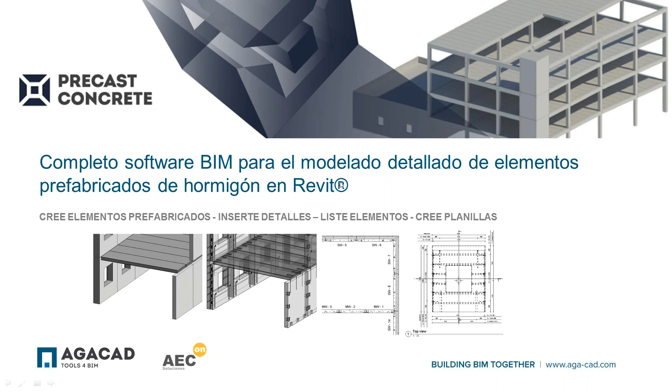Veréis que con Precast Concrete podremos crear elementos prefabricados a partir de los elementos arquitectónicos que ya hemos creado en nuestro modelo de Revit. Podremos insertar detalles, podremos crear listados de elementos, obtendremos directamente las planillas y veremos cómo todo el flujo de trabajo, a partir de que estamos modelando el diseño, el resto de la información se va actualizando hasta la planilla, con lo cual el ahorro de trabajo y esfuerzo a la hora de crear finalmente las planillas de producción es realmente importante.

La aplicación Precast Concrete incluye estas funciones: el Floor Panel Layout, que nos servirá para convertir los forjados, las losas de Revit, en el panelado de forjados prefabricados. Luego Smart Walls para todo lo que es la gestión, el manejo y modelado de muros y sus juntas. Los Smart Details para crear las conexiones y los detalles de las conexiones. El Sort Mark para crear una clasificación automática de los elementos. Y finalmente los Smart Assemblies que nos van a permitir crear los dibujos, las planillas de nuestro modelo.

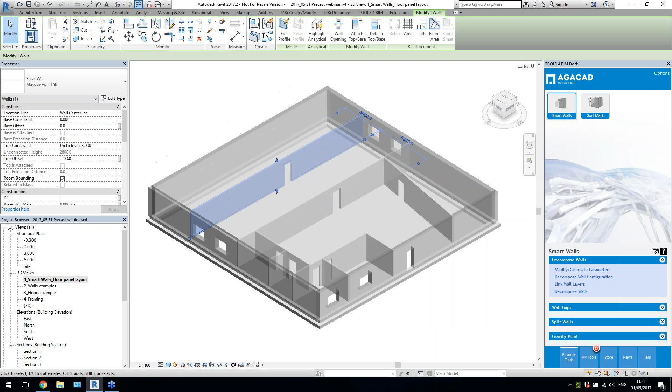But let's take a look at how does it work and what can we do with this solution. So when you model some elements in Revit, you can further use our tools to reach the result you want. So what do we have in Smart Walls? We have Decompose Wall. This option gives us the opportunity to split the multi-layered wall into a couple of walls.

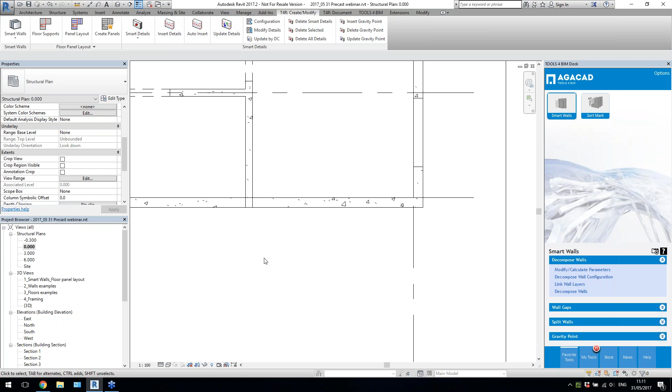So if I select, let's say, 2 of these walls, and I click on decompose, I have some configurations for how to decompose them, what walls should still remain, and so on. But now you will see that I have different walls, and if I select them, these are not layers anymore, but only walls. So let's say I make them architectural, and I have only structural walls now.

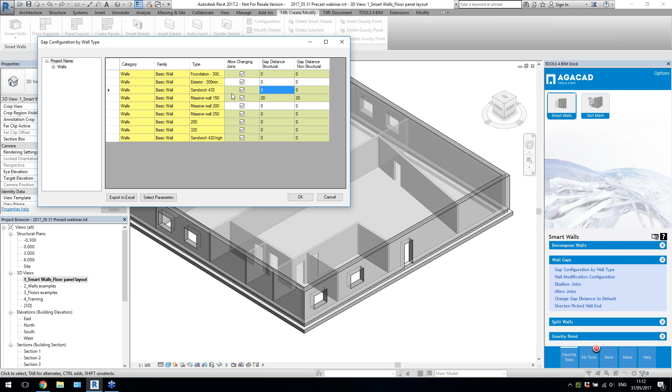So that's one of the features, but let me just undo that, let me leave it like this. What actually I want to show is other functionality, which I use more to create panels for the precast elements. In wall gaps section, I have some gap configuration by wall type settings. In these settings, I can define what should be the gap when I split the walls into the panels.

Let's say for this type of wall, I want to have 20 millimeters gap; for this type of wall, I want to have 0 millimeter gap, and so on. So to work with walls, we have the split wall menu, and we have the shorten picked wall end command, which I use a lot. Let me just switch to level 0 and show you how it works. If I select this shorten picked wall end command and select the end of the wall, you will see what happens: it just disallows the joint, and gives me this gap, which is defined in these configurations. So I can go around my walls, separate them, and just make some individual walls separated from the others.

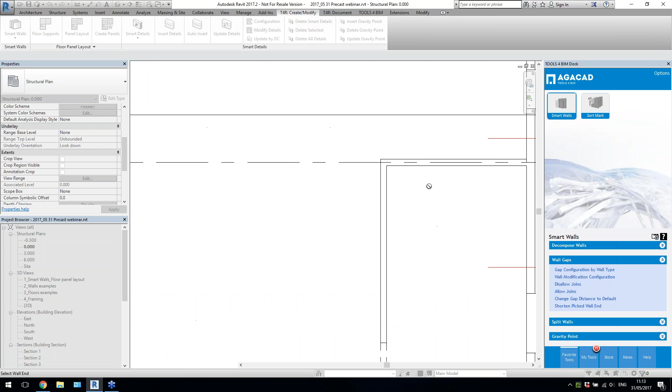If I click on this one, I can change the position, right? Let me just do this a couple more times. Okay, this one also, and this one. Okay, so I separated the walls. Now they are not joined. This is what I want actually.

Now I will switch over to the split wall menu, and what do we have inside here? We have some splitting commands, like individual splitting commands by selecting grids or other walls. We can split by openings.

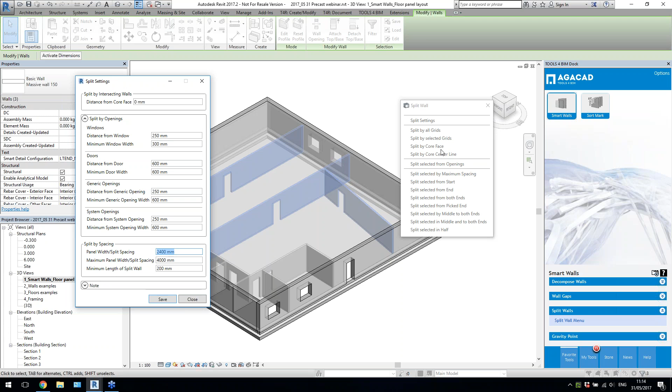So let me just go to 3D view, and I will actually use this. We have split settings here, right? So how to split around windows, around doors, around other openings, and what should be the distance for the panels when we are splitting them by using these commands, right? The maximum is for this command, and this distance is for other commands.

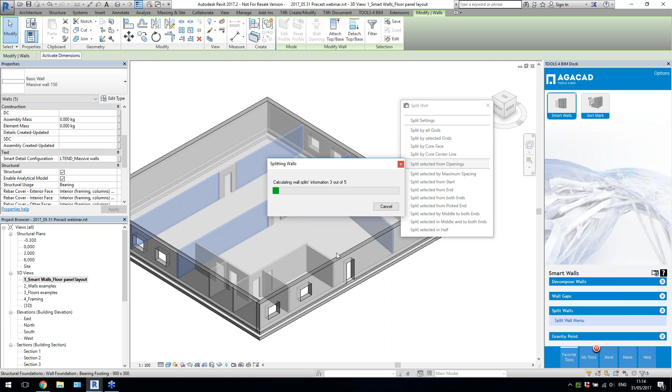So we can define some settings here and then use it. So I select a couple of walls and split from selected openings, and it will just do it like this. Then let's say I would like to split these walls also just from the start of the wall by a defined distance, right? So now I have this wall where the length is just based on my splitting settings, and then the leftover here. So I split some of the walls.

If I select this one, split by maximum spacing, let's say. So again, I have big walls just based on this maximum spacing value. It just divides all the length of the wall and applies the biggest value it may.

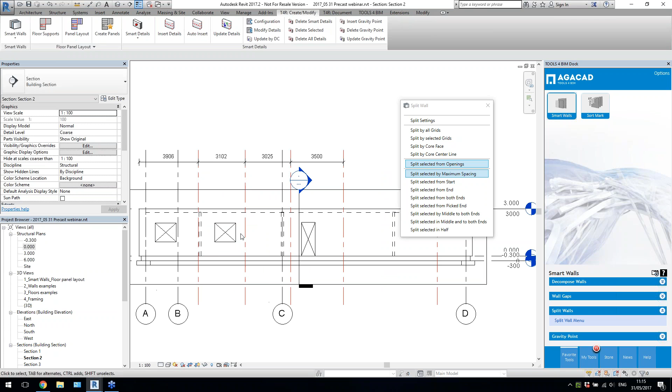Then I have some individual splitting options. Let's say I can use grid lines to split the walls. So I will go to the section view. Let's say I just create grids like this, different type, and then I can place some dimensions and define really exact positions of my splitting location, right?

So let's say I can fix that, and then I can split by selected grids. So I select the grids which I want to be splitting points, escape, and select the wall, and then escape, and then it will split into the exact panels which I defined with the grid lines, right? So now I have all these panels split.

Let me go to this view. So, okay, I have it here. I have this one. Okay, so that's basically it.

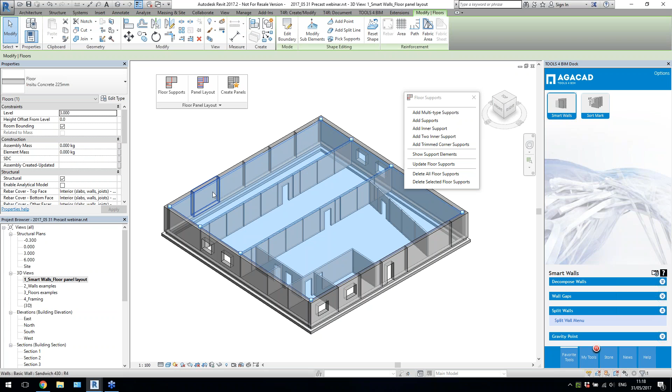So I have regions. Where do I want to place my floors? I want to have a floor from here to here, from here to here, and from here to here. So I need some regions, okay? So I'll add a couple of more. I will add this one, this one, this one.

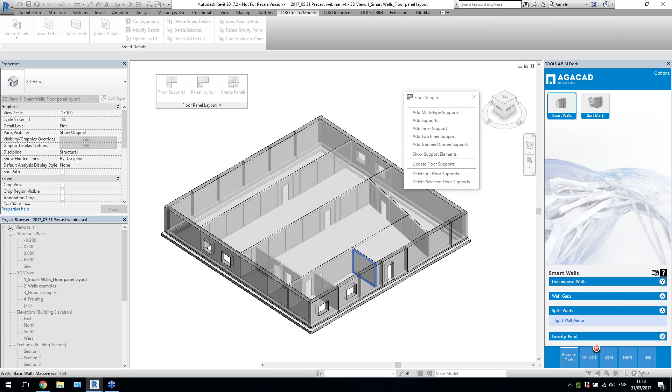No, actually, I would like to make it a little bit in a different way. I can also, I think I will do it like this. I will split this one again by selected grids.

Okay, so now I have it. I think it will be better also for the floors, so let me do that. Okay, I have it like this. Now let's add supports, additional supports. Okay, so now it's what I want.

Now I have different regions here. I just split into the regions and I select the supports, right? So I will close down this one and open the panel layout.

In the panel layout settings, we have what size of a panel should be created and what should be the rule. When I select that, I can select the option if I want to create panels for one of the floor. So just like this. Maybe I will just delete that.

Or I can do that for the whole floor, right? So I select one of the panels and it will just create the layout of the panels based on the supports. If I don't like this region, I want to update it, so I can click on this side, close to this side.

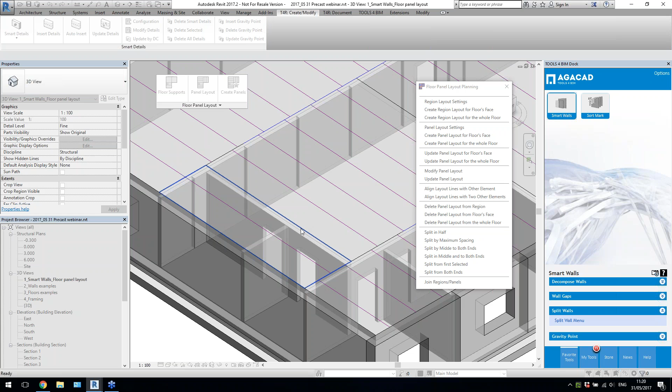This will define the direction of my floors. So if I click on that, it will change the direction, right? If I click near this side, it will change direction to that side. So I can modify that. Okay, so I want to have it like this.

Again, I can join the regions - maybe I want to have a massive slab in this place, or just a cast in place region, and so on. So I can do that. Then let's say I can modify the panel layout - I will just select this one, change the distance, modify, and it will give me a different layout, okay?

So currently what I'm doing is just the planning, right? I only have lines, I don't have actual panels yet. But that's why I need this last step - to create floors just in these planned areas.

In panel settings, I can define that I want to have this kind of support width for the panel above the wall. So I can define these values. I can also select the parameters for the floors, so I can make a schedule with the width and length, right?

Then for the precast floor, I just select the type of the floor, and I can insert holes if I want to. These are predefined holes, but you can modify them if you want to. So you prepare these settings - how do you want to have supports, and what kind of floors should be used.

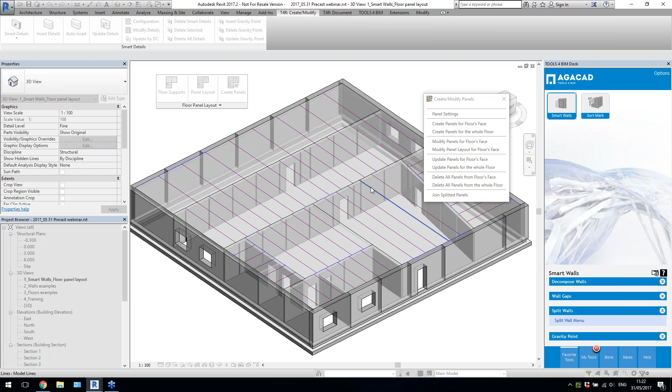And then you create panels for the selected floor face or for the whole floor. So let me do that for the selected floor face, and I will just select one of these lines. You will see now that in this area, I have this kind of floors. They have automatically calculated parameters, so I can make a schedule.

These holes are a generic model family. I can edit and modify it simply by editing this profile - this is the sweep, right? So you can easily edit this family based on your local manufacturer.

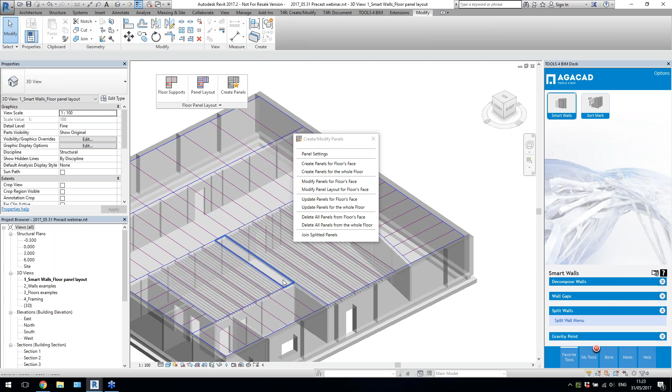Okay, so let me get back here. Maybe just create another one over here. So again, the floors like this. In the leftover, which is not 1.2 meter, I have only cast in place or just a selected type of floor, right? So this is a different type of floor, and this one applies in this area.

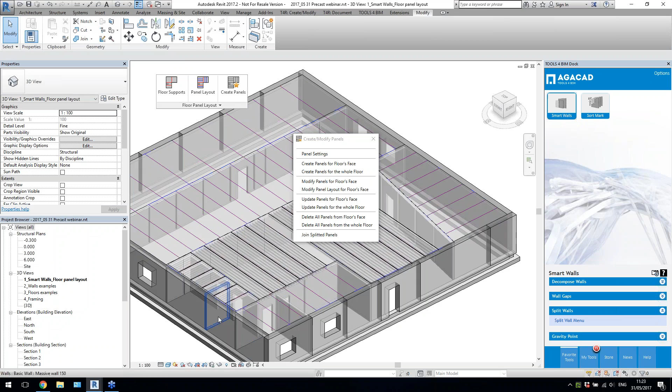Again, I want to change the size, let's say, for the small slabs - I want to use different holes, right? So I will do it like this. Sorry about that - create panel, and just create it here. So now I have smaller slabs over here in this area.

Then let's say I don't want to have holes, I just want to have this thickness of the floor. So now I'll create floors over here, and now I have the floor which goes like this.

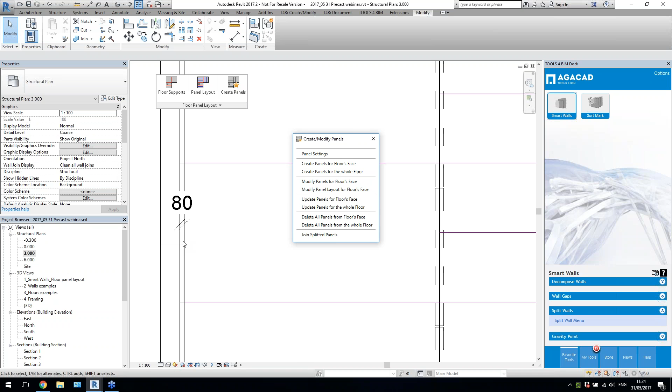And if I go to level 3 and measure now the distance for my floors, this is the floor which I created, and you see that this is the distance - 80 millimeters, like I did here in the settings. For the walls, I have 80 millimeters, or from the face. So when I create the floor, it automatically places my floor and extends it over the structural wall. So that's how we can create panels, right? We can create our floors.

Let me go back to this view. Okay, when we model these elements, what can we do next is use smart details. So smart details is basically a solution to insert details, connections, cuts, just to get to the final shape of our elements.

So let me show how does it work. It has configurations - in the configuration, you select category of elements which you want to work with.

Let's say I want to work with walls. So I switch over to this category.

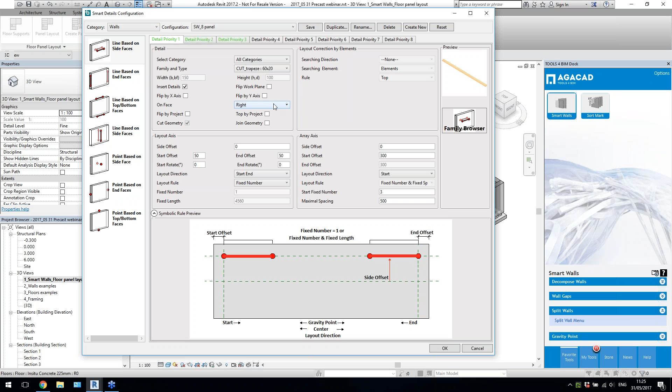Okay, now you see I have created a lot of configurations, but just for different purposes. So what you see here is tabs where you define where and what kind of detail and in what kind of rules should be used to place this detail. So these are for the line-based elements and these are for the point-based elements.

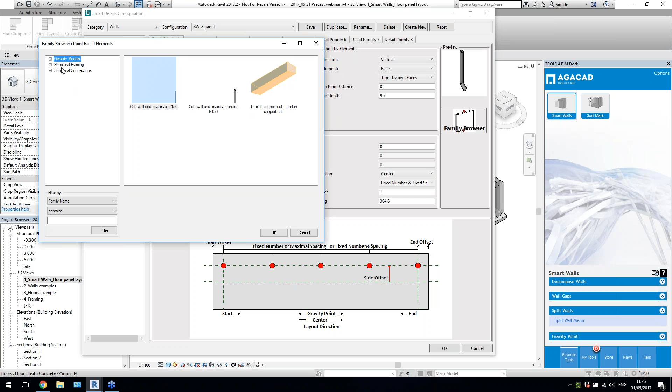So let's say I select this tab and I want to place on this face some kind of detail, right? So I go to this detail priority tab. I select my family, which I want to use from the list or from the family browser, which I have. So these families could come from manufacturer, or you can create them on your own. And you decide where to place it.

So I want to place this at the bottom face of my wall this time. And I want to place it just side offset. You see all the options here, some start offset, and so on. I want to use the rule maximum spacing. And then I want to place in the other direction. In this direction, I want just to place it in the center, with just one element.

And then layout correction, we have some options here to look for the solid faces like you see in the picture. So if there is not enough space, this detail will not be inserted, and so on.

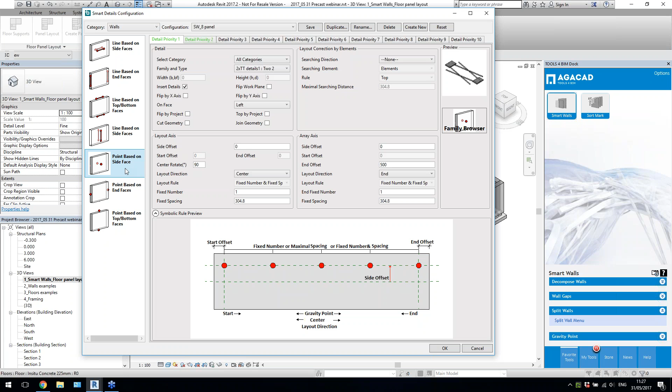Then what else do we have? Let me switch over to our CAD configuration, and I will show you, let's say... okay, what else? What should be?

Okay, I want to insert a detail at the end of my wall only if I have a T connection with other walls. So if I have a T connection... okay, maybe this one. So I want to place it on the side of the wall if I have a T connection with the wall.

So I have different kinds of connections with other elements. It could be walls, it could be structural framings, or other elements. If I find an intersection, I will place this detail. If not, this detail will not be placed at all.

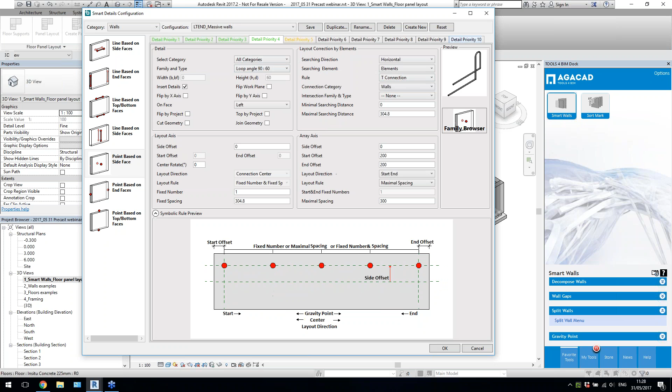So let's just close down this window and see how it works. Actually, maybe I'll just filter that—check none. Okay, I'll just hide these temporary elements.

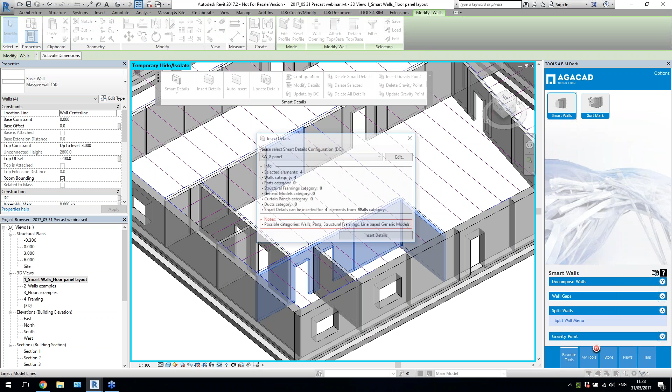And let me just select a couple of these elements, right? Maybe this one. And now I will select to insert details. And the list of configurations appears. And if I select my configuration, this one, and I will insert details, right?

So it will just place the details based on the rules for all of these elements. So we will see some different results because, as I said, we can search for different connections and insert different kinds of details. So let's take a look at this one, right?

So it has only end connections, so it places only these details just based on my settings. Then these details are at the bottom face and these details at the top face of my wall. Also, I have this kind of cut at the end of the wall, so I can place it and use it, right? And then let's take a look at this one.

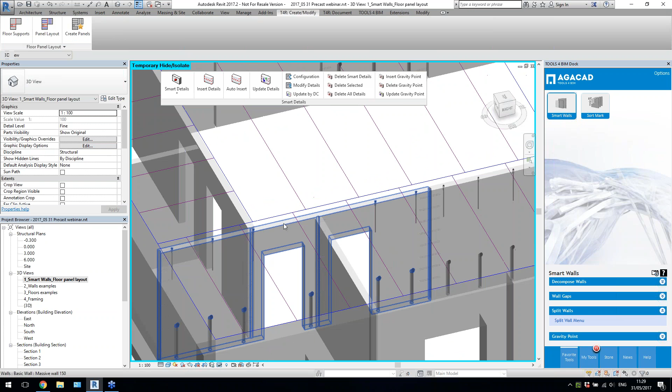If we take a look from the top, maybe it's the best visible view. So you see we have this type of connection because we have a T connection. If I select this detail and click on modify, you will see that this detail is only inserted if we have a T connection with a wall. So now I have this detail and I have this detail at the intersection with walls.

Then this one, again, at the end it has just a simple one, but then it has an L connection like this between the walls. So it places this detail when it's an L connection with other walls. So I can define what kind of detail and where it should be inserted, right? So these are a couple of examples.

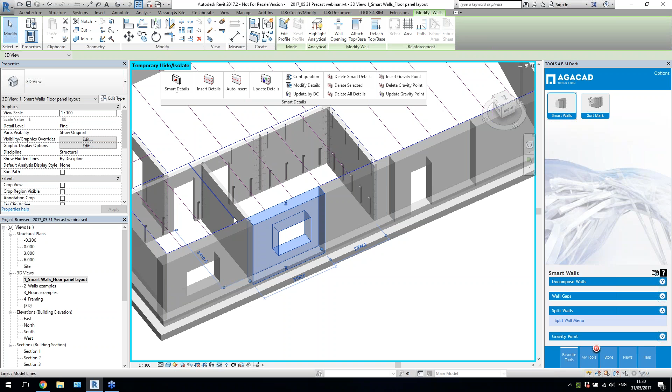Okay, maybe I will show you another one. Or maybe, okay, we can switch over to the other one. Let's say over here, right?

So if I select... let me just filter the floors. I selected a couple of walls and floors, select to insert details, select the configuration which I want to use, and insert them, right? So now I have my cuts at the end of the floor.

So again, this is just what I created, right? I can modify this. This is the line-based details placed on the top.

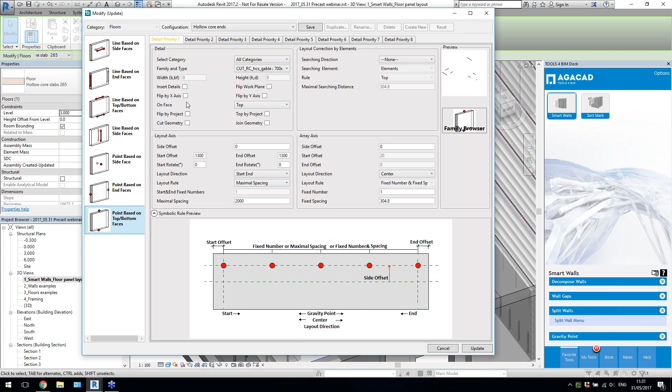I can just make some changes, click on update, do some individual changes. I can select the floor again, just modify these details. I have some predefined details, so I will just click on update, insert and update. I will place some anchoring cuts for this selected floor and so on. So I can quickly make some manual modifications. I have modify, update, delete options and so on.

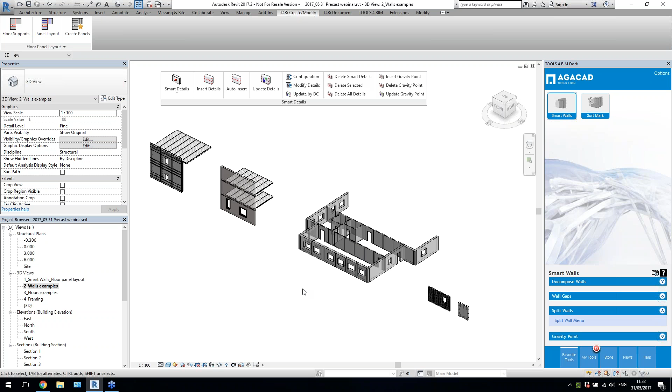Let's take a look at a couple more examples. I have here, let's say, these walls, they are pretty high, right? So I just placed some of the reveals by a defined rule. I placed also some sweep just outside the wall, to join with the wall. Then at the top I have a cut and so on. These details are good also.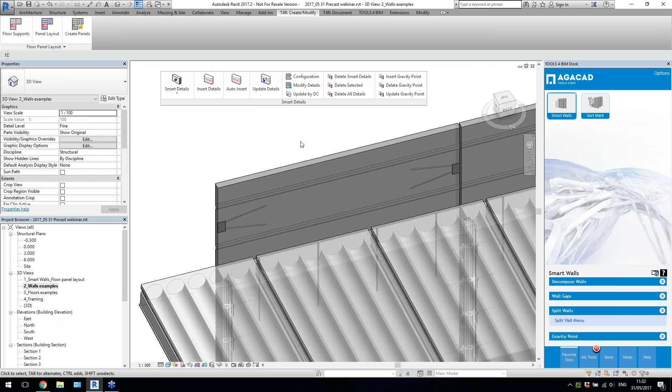Oh, I see these details are bad, but actually what I will do is just click on modify. I know that I selected the wrong family here, I need to select this one. Smart details have the possibility to read information from the object, so you see now the wall is this size, but the details find the size of the wall. If we take a look at the family, you can create special parameters which will change the size of your detail or the distance between your details, just based on your element size. That's why it just follows the size of the wall over here.

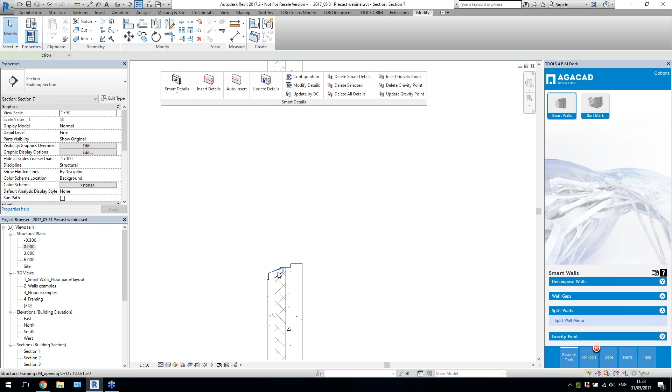Okay, so I'll show you a couple more examples here, these walls. Maybe I'll just go to the section view and let's take a look now. I have this kind of walls, this kind of opening just joined with a couple of concrete, right? And I have a wall like this, and like this.

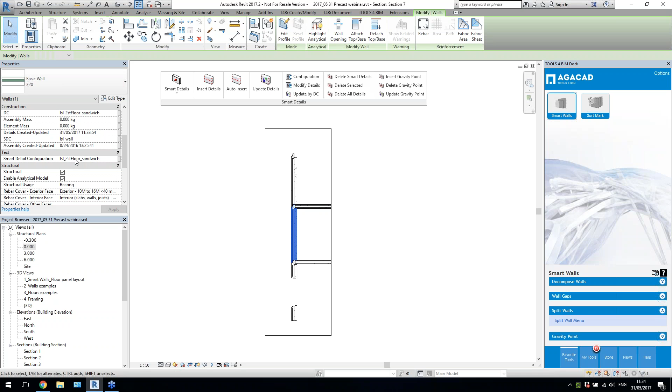So let me just select these walls and do the auto insert. What does auto insert mean? It means it will read the configuration name which is inside this parameter, reads this name of configuration, and it will apply that configuration. I don't need to go and select from the list. So what's the result? I have placed some cut at the bottom, I have cut the top, and I have added this concrete detail, so now I have good connection.

For the top wall, again I have this kind of cut just to cut the top wall, so now it looks good. And in the section view, of course, I have some vertical cuts over here at the ends. These are my window families, but basically that's another type of wall which could be created, right?

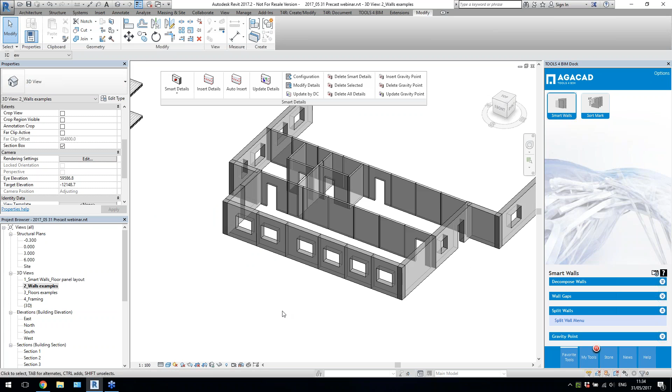Then let me show you a couple more examples. Let's say I will just select a couple of these, and I will just do the same, I'll click on auto insert. Hopefully I have added the names of configurations. Okay, so 16, 17 walls at the end. So I have like 36 walls with details now.

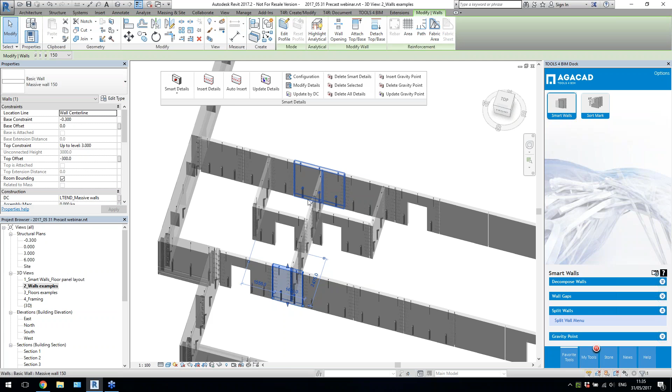So these are massive walls, right? So as previously I showed you, like this, then we have T connection, we have these elements, then we have L connection, again we have some bend, stirrups and so on. So it could be like this, but these elements are massive walls. So I placed just a couple of details right over here.

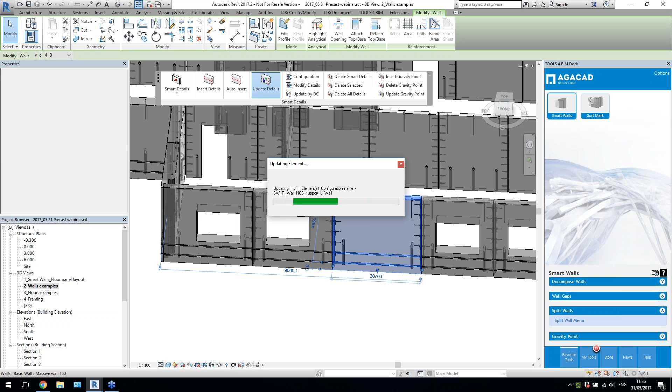Let's say if I will delete this, I'll do actually update details, right? So you will see now that I have an additional tube here because there is enough space for this element, and in this case I don't have this one because there is just not enough space. So I can define that in my rules.

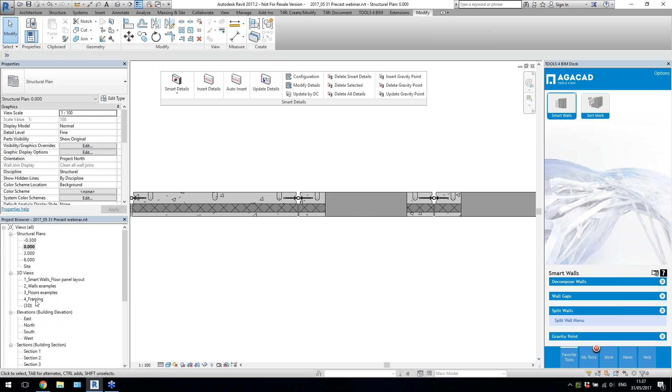If I'll go to level 0 and take a look at this view, what did I do? I just placed a couple of openings, created some families, just the shape, how do I make my connections. When I placed these elements, distributed them along the detail and so on. Over here we have also some connections at the corner. So again, I decided how and what should be done, what kind of connections do I usually use. And then I created these walls. This is the cut which I inserted at the top to place my hollow core slabs and so on. So you can define whatever you want, right? Or some architectural reveals or whatever.

Okay, what do we have? Floors. Okay, walls examples we have here. Maybe I'll just stop here. You can insert plates, right? So just a different kind of connection, or just at the bottom if you use this kind of connection.

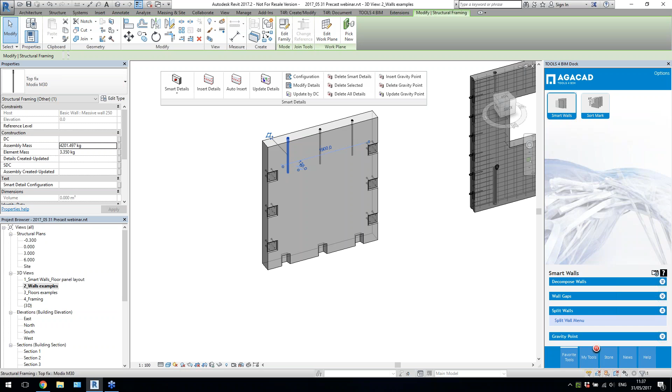So again, these are just simple face-based families, right? If I edit this family, this is just simple extrusions placed in the location I want. So there's really nothing to create them or to use some families from manufacturers.

I will switch over to floor examples. So again, floors could be like line-based elements inserted, or some point-based elements.

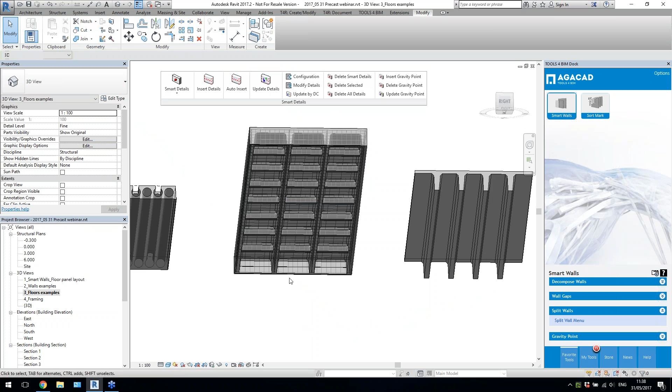Okay, another example, filigran slabs. Just let's say this kind of slab with additional support elements and beams on the side. Hollow core I already showed you. Then this is the cut. Actually, only the void was inserted to form this kind of element. Again, this void can read information from your floor, and it can adapt the size and so on. This one, again, just based on your floor.

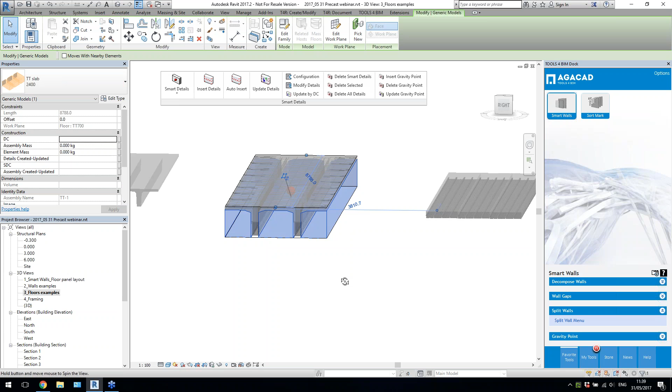Over here I have this kind of detail, then a long cut along the floor, when I have distributed this kind of composite elements on the floor and so on. So you can make it in different ways.

Let me maybe just go here and I will show you a couple of examples. Let's say these, and I will select insert details, filigran slab, insert details. And you see now I have these elements. These are just a line-based family which I created right over here.

So I don't know, the maximum spacing, what's that? Can we change that? Update and have it different, right? So it's not a problem. Just change that, or just change the offset from start and so on. So it depends on your settings.

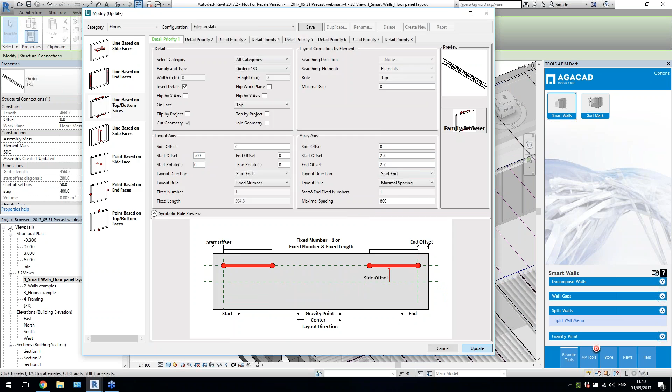Okay, maybe in this direction we can also make it different. So again, modifications could be just as you want, quickly in the local area for the local selected elements.

Let me switch over to this one again. If I select, let's see, foundations again, I think we can insert some elements here. This is the wrong family probably. Okay, I will just make it over to update my details. No, you don't want to. Insert and column bolts. So this one was already...

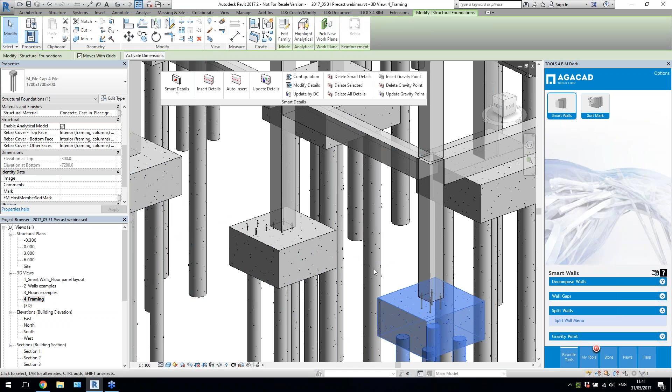Why it didn't work out? I know. When I place the detail, I need to change this, and then probably this time it should use the last settings. I have used the wrong size. Okay, so I'll just do it like this now.

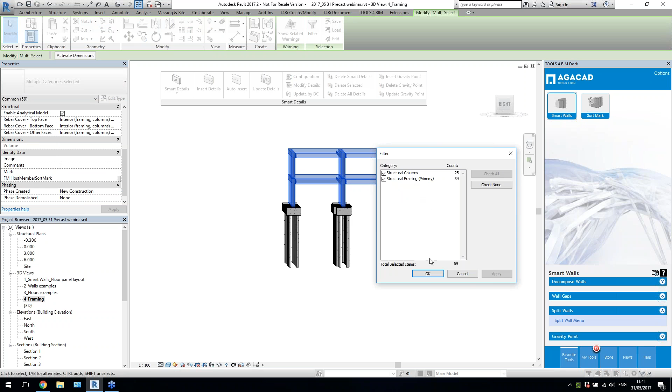Insert details, insert some bolts. Okay, so I have them like this, right, on the foundations. But now what I want to do is to select the, let me see, columns and framing elements, and I will click on auto insert, because I have entered again the name of configuration into the beams. I just don't want to waste your time by picking the configurations from the list. So let's just see.

Okay, so I have selected 59 elements, and now I have some details, right? What do I have? Let's say this beam. So now it has this kind of elements, just inserted by gravity point, 2 elements. I can make some changes, do the update if I want to, right? So it will just move around the gravity point of the element.

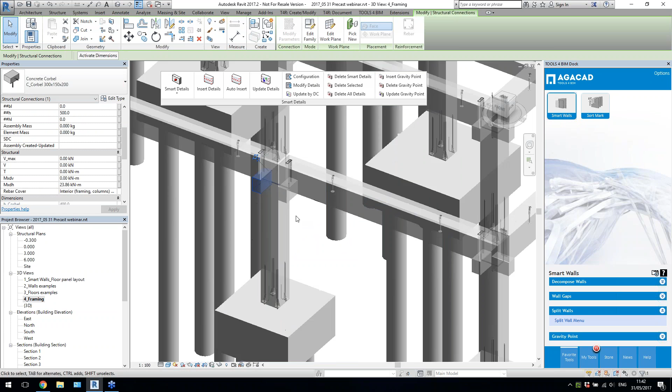Again, I have placed these corbels, right? And if you see, this is the corner column. So again, it finds how many structural framing elements we have. So if we have this beam, we have this corbel. If we don't have a beam, we don't have a corbel, right? Let's say in this area, I have already 3 corbels, 1, 2, 3, because I have 3 beams again. Then I have columns which go from the first floor to the last floor.

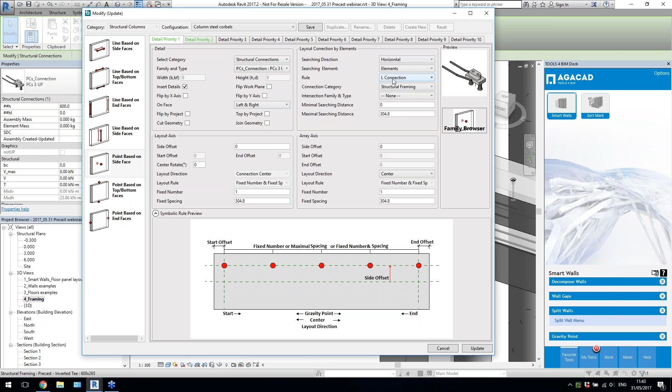So when I have a T connection, I have this kind of detail with anchors to the top and to the bottom. But when I have an L connection, I have this kind of detail, just anchors to the bottom. So if I take a look at configurations, you see L connection and T connection, this detail. So again, another feature of smart details.

Then, okay, if I make changes to this beam, right, so this is a bigger beam, now it's not fitting.

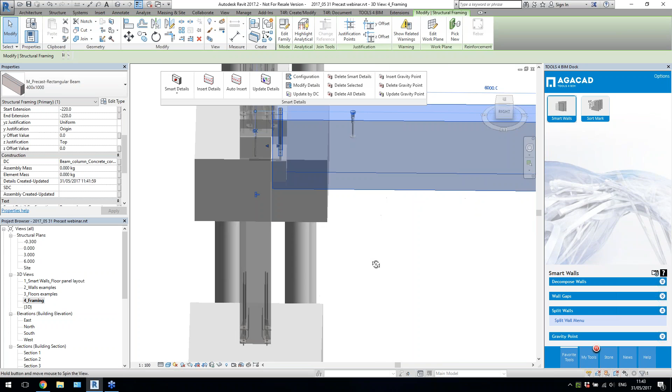What can we do about it? Because you see now the hole is not coming through, the corbel is not in the right location, so I'll just select these three elements and do the update. Now it will read the size of the beam again, and it will move the corbel again. You will see it's under the beam, because I can use special parameters to read the size of the beam.

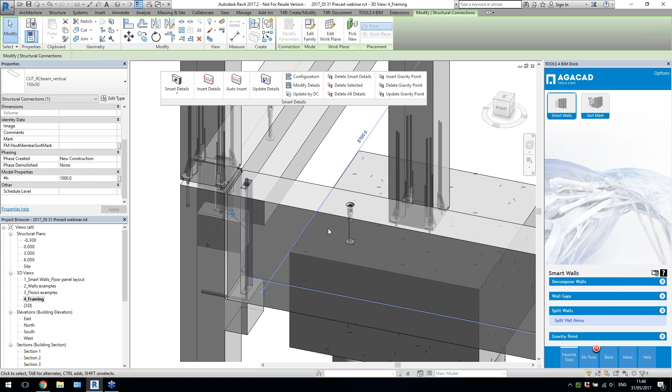I also did the same with the hole family, which is also reading the size of the beam. You see, it's 1000, so now it's changing the size, because this hole has a parameter which is reading the size of this beam.

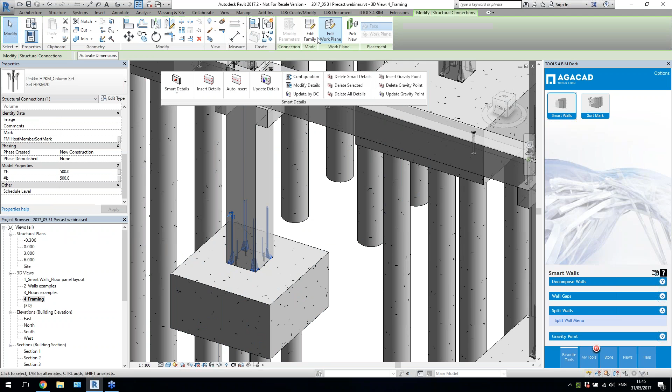These are different options for how to work with that. If I change the size of a column and update the details, you see the column shoes will also follow the size of my column, because now they are reading the H and B values from the column family. So in the family, I can use these parameters to move my elements. If my column is bigger, the distance between my bolts will change size, and so on.

So that's another feature of smart details. I think that's enough for smart details. We can move on and try another solution: sort mark.

I will use it from the Tools4BIM dock. Let me move this here, and let's see what we have. What can we do? We can automatically number elements, right?

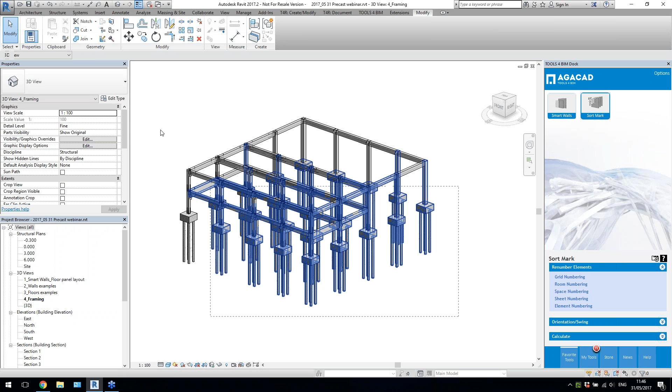So let's say I will select the elements I want to renumber, like beams. When I go to element numbering, this time I will just write information to the mark parameter, click OK. What kind of information do I want to write? I can define this in the rules and save it.

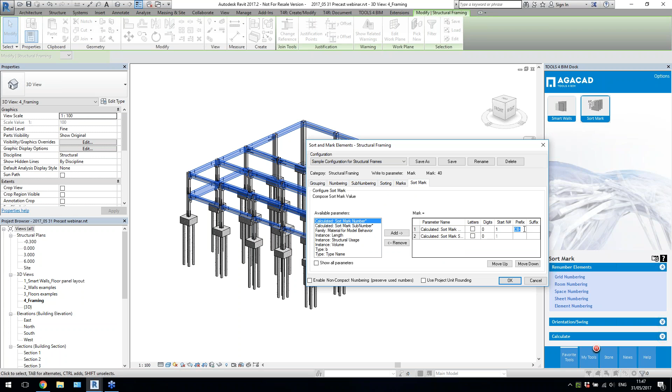I can group them and number them based on the selected parameters from here, let's say instance or type parameters - we can add it, right? So if these values are different, we get a different number. There's some additional subnumbering, sorting options, and what should be the prefix before the number.

If I click OK now, it will renumber all of these beams. Some of them will have the same mark because they have the same length, volume, and so on. But if I take a look now - okay, so the mark value appears here. I have different mark values for different beams.

I can do the same for the walls, for the columns - element numbering. I can do that for all elements of one category or for selected elements. Let's say for the walls, I will do the mark, and I can save different configurations for how I want to number them.

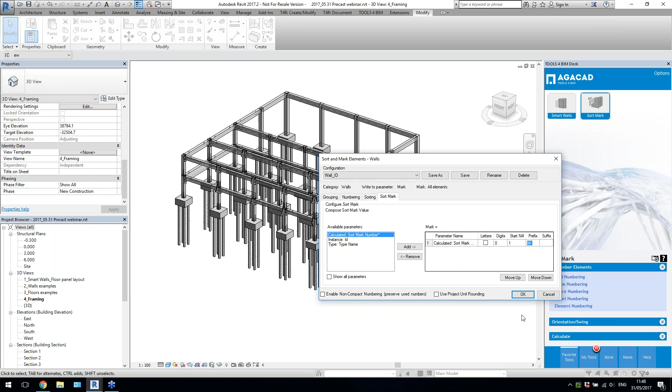I can even use sorting coordinate - let's say just go 1, 2, 3, 4, 5, keeping the order. Or I can add an instance ID parameter, so all of my walls will have a unique mark value. With prefix and so on, I can select what kind of numbering - okay, 94 walls were renumbered. So now all of my walls have a unique number and are renumbered automatically.

So that's good. Now the final stage is to create drawings, and for that I will use smart assemblies. This solution is created to generate the drawings. So what do we have here? We have a lot of commands, but let me just quickly guide you through.

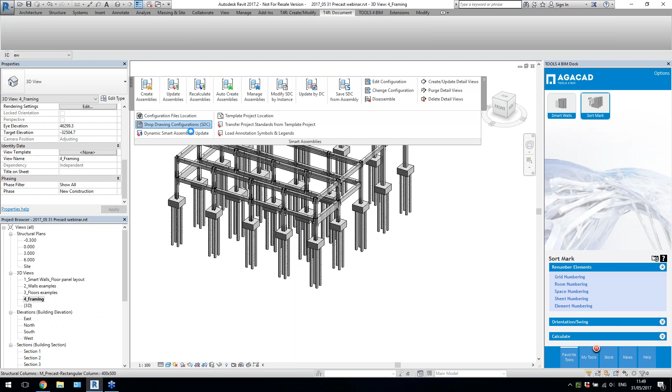Shop drawing configurations - again, we have some configurations for how and what to create. Let's go there. Over here I have a couple of configurations already created. Let's say this one - you will see that I want to create these. Maybe I'll just select the column, it's more interesting - now I can create assembly views and model views.

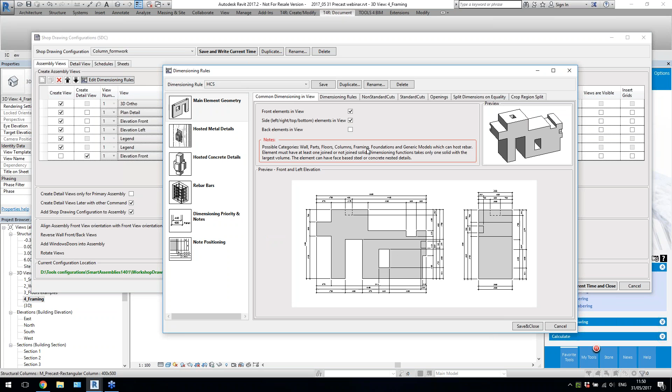I can create any selected type of view, right? It could be some default Revit assembly views, or we have some flip versions, we have legends also, we can rotate these views automatically. We can select the view template we want to use, and select the dimension rule described in the dimension rules dialog window. Different kinds of dimension rules can be created - how to dimension the main element, how to dimension openings in the main element, how to dimension hosted elements, concrete and metal details, then how to dimension rebars, and what kind of information should be provided.

Should we place the note? Should we place the dimension for these elements? Okay, so you prepare them and you can assign this for any view, different kind of dimension rule.

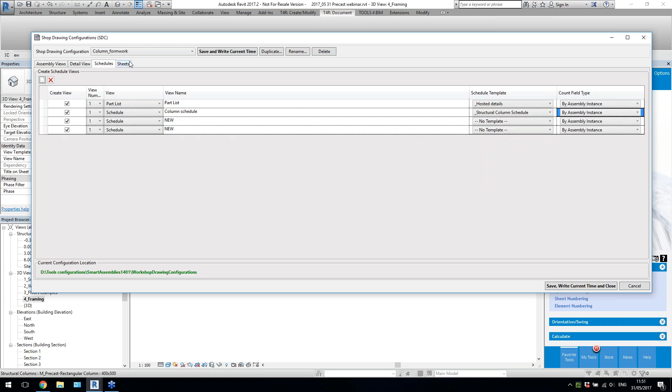These are options for the detail view, for the views in the model. Then we have schedules. Again, we can create as many as we want, material takeoffs by using some templates, for instance of a type of assembly. Then we can create sheets and sheet templates.

So let me go ahead and show you how it works. I'll select only columns, I select 3 of the elements. If I use Revit, it will create one assembly like this, and you will see that all the details are not included. So that's the way Revit works, and that's a little bit different with the smart assemblies.

With smart assemblies it's like this. I select only elements, main elements. Then I click on create assemblies. I select the configuration which I want to use, and I click on create. So it will create assemblies for me, and it will automatically add all the details, hosted details, to the assembly automatically.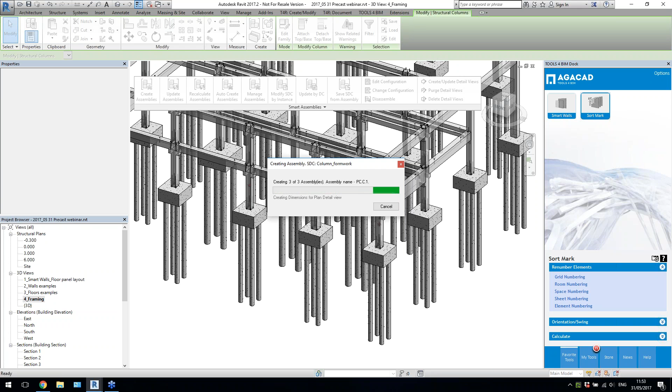I selected also to insert gravity point, just based on material and the geometry of elements. Then it will also create the selected views, place the dimensions based on the dimension rules, and place the views on the sheet, so I don't need to drag my views on the sheet. You can use a template project where you keep your assemblies and sheets of assemblies, and then use the same layout of elements in the views, in the same order.

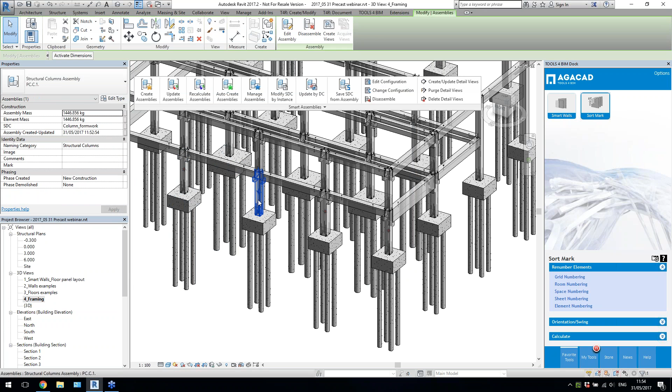Let me show you, this is one, this is another one, and another one. So I have 3 assemblies right now because they are all different. Let me select another one, I want to show you one additional feature. I'll select this one again. The same configuration, because this one should be the same. Yeah, it's the same, it's a copy of this one, so they have the same type. That's the way Revit works.

So let's take a look at the assemblies. You see I have created this assembly, and I have some dimensions as I defined, to measure the elements, to measure the gravity point, to give the total dimension of elements, to create 3D views, some schedules, place legends, and the selected number of views. So maybe over here, this is another one.

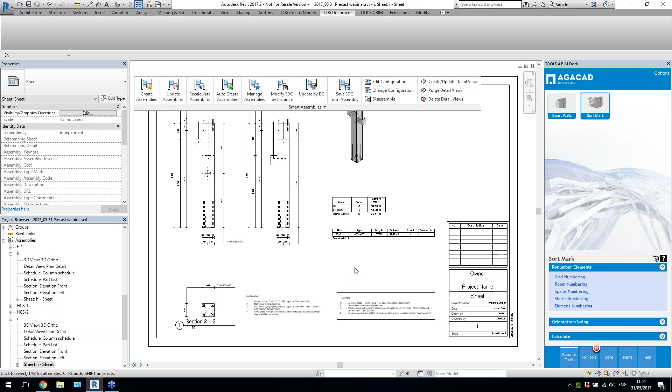I didn't renumber my columns, so that's why I have such names. Actually, the name of the assembly is the same as the mark of the element. I have created a couple of assemblies. So another functionality of smart assemblies is that, okay, let me select.

Now this command selects all the same type assemblies, but I want to see the primary assembly, the assembly which has drawings. So this one has drawings. So I have this kind of functionality, dynamic smart assemblies update.

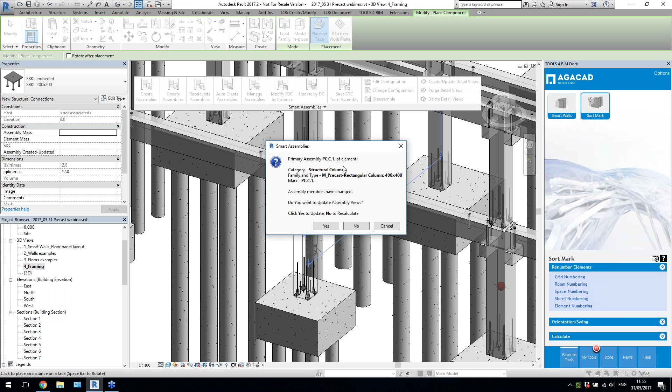If I turn it on, and I try to make changes... sorry about that. I want to add a detail. Okay, this detail. So if I make changes to the assembly, it will ask a question: what do you want to do? Do you want to update drawings, or maybe you want to skip adding this detail? But I want to just recalculate that.

Now it updates just the gravity point because I selected like that. And additionally, it will add the detail to the secondary assembly. So you see this one was updated also.

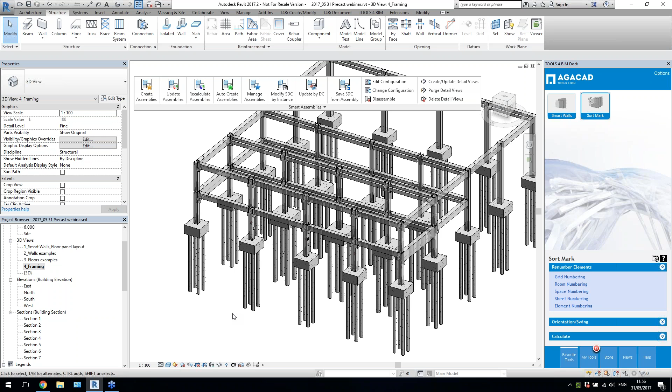If I turn it off, just like that, and now we do that, it will be just a regular Revit way. We make changes, we get a new assembly. And now these are two different assemblies, and the detail was not created in this assembly. So that's an additional feature. Maybe you create all your walls and some assemblies, and you forgot to add something to all the same type assemblies - you can add that with the dynamic update functionality.

Okay, what else? So we create assemblies. Let's create another one. Just for this one, can I just auto create? Hopefully, if I have entered the name of the configuration. Again, it works the same as Smart Walls.

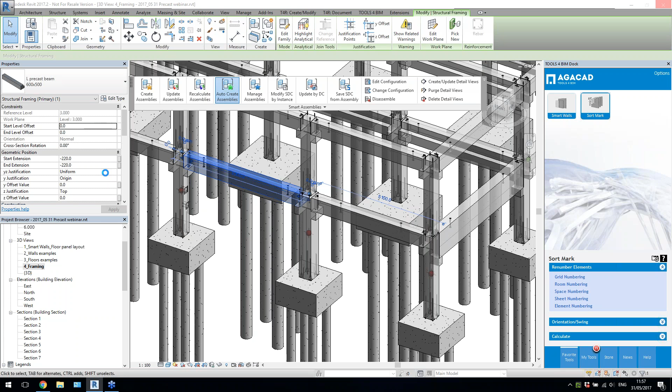Okay, so again, it works with different categories, with different elements. Let me just show you a couple of examples and we can finish today. Okay, maybe this one, yes, I have created. So this is now the drawing, automatic dimensions, automatic placement on the sheet, and so on.

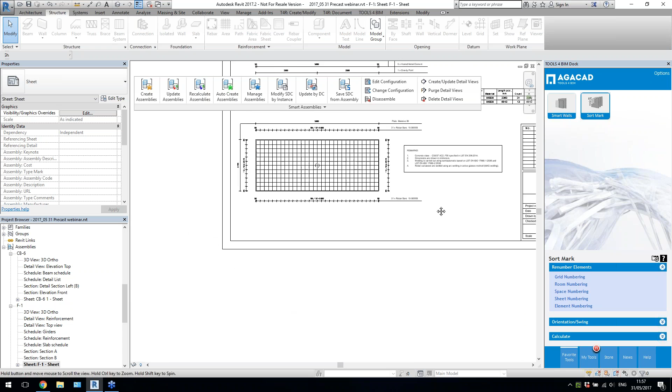So let me show you a couple of examples. Let's say this is automatic drawings of a filigrane slab. So again, I have dimension for the filigrane slab, for the reinforcement, some legends, and so on.

Okay, Hollow core slab I have created in this project. So again, some layout which I defined in the template sheet, in the template project. Then I have this kind of wall, right? So it has some details and so on.

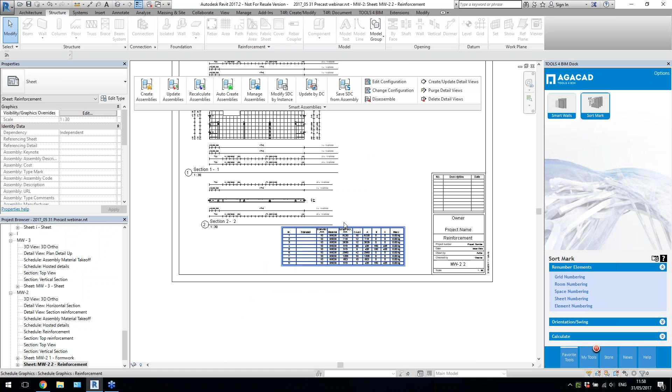Then I have also modeled one wall with the rebars. So I placed one sheet only with the formwork drawings, right? So I have all these dimensions for my elements, and then I have reinforcement drawing. Okay, so I have it right there. So all the reinforcement table, and so on. So whatever information you want, and so on.

So there are more options and possibilities, but I think it's enough for today. I hope you just saw the possibilities and so on.